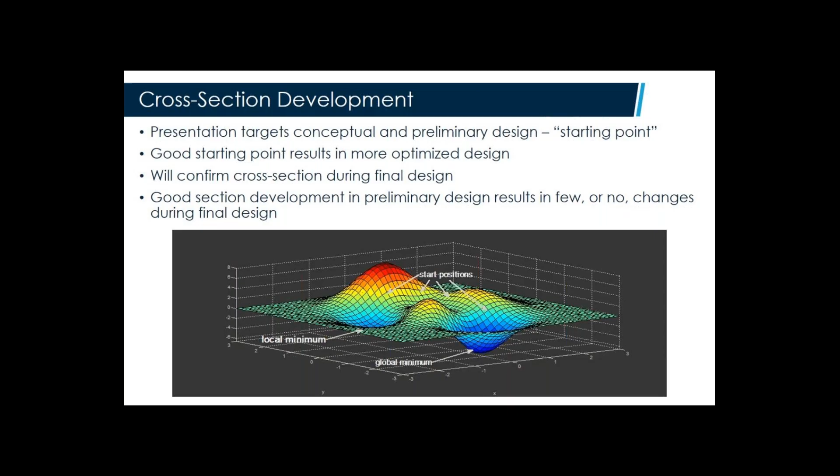A good section development in preliminary design results in few or no changes during final design, using some of the rules of thumb presented in this presentation. This has resulted in final design efforts with very few changes and no backing up, which affects not only your longitudinal designer but your transverse designer and so on. So it really helps with schedule and budget to have a good preliminary design.

We will touch upon the longitudinal behavior, the transverse behavior, substructure considerations, constructability, and a little bit on aesthetics.

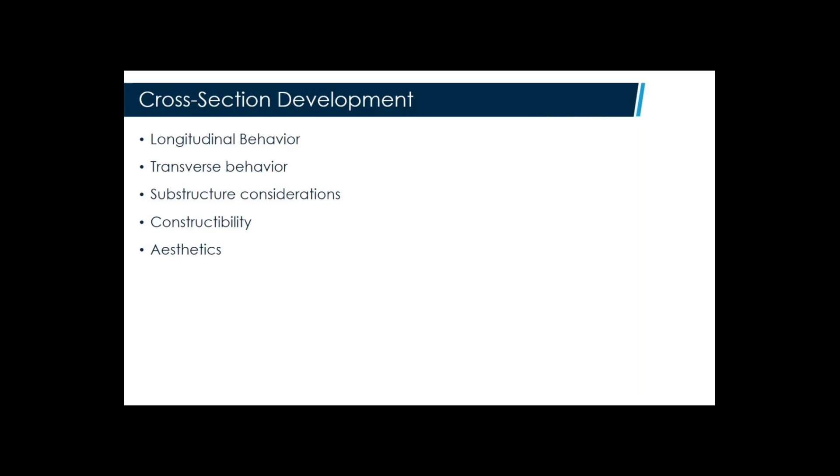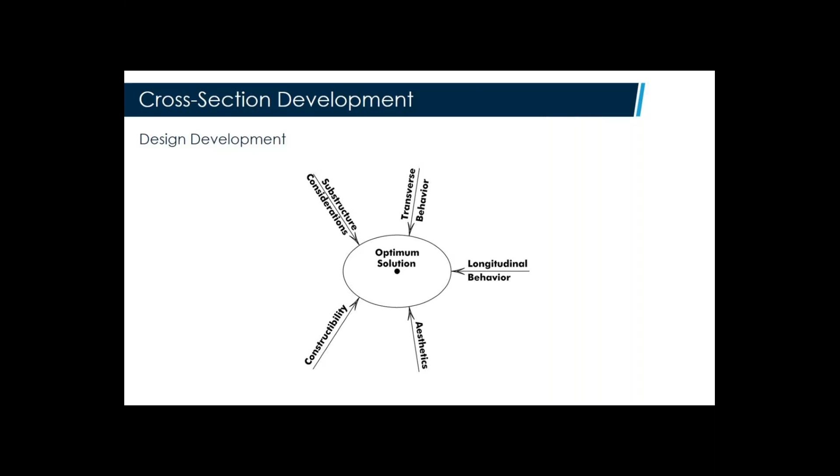Now, when focusing in on your preliminary design, you can't consider one aspect, for instance longitudinal, to the exclusion of all others, or you're going to be doing a lot of backing up. You need to work each one of those shown, constructability, transverse, longitudinal, and so on, together to bring them into a final optimum solution.

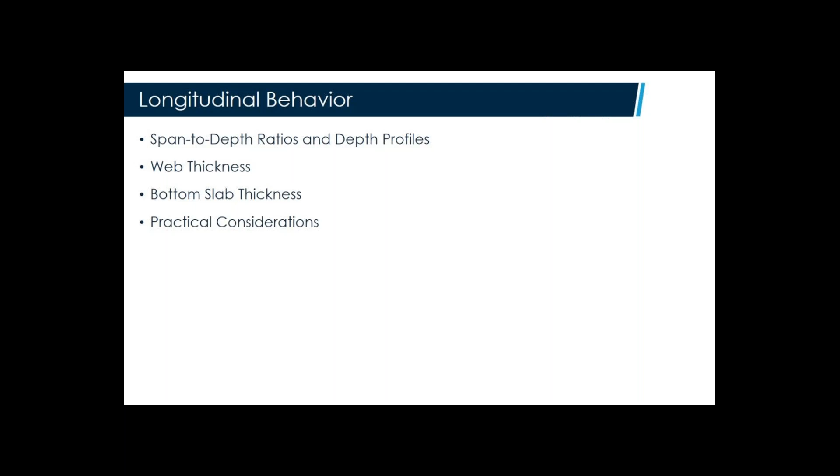Now getting on to longitudinal behavior, we'll talk about span to depth ratios and depth profiles, web thicknesses, bottom slab thicknesses, and some practical considerations. Constant depth structures, this presentation is going to target span by span and balanced cantilever. I'm not going to get into cable stay bridges, but with span by span construction, span to depth ratio of

16 to 22 usually works very well, with 18 being optimal. And for balanced cantilever construction, I'm going to say up to about a 250-foot span before you start wanting to go to true variable depth structures. And the span to depth ratio is a little thinner, 18 to 22, with 20 being optimal.

I will note that, especially on the upper range of these spans, you're probably going to need to thicken the bottom slab. And I'll pause for a moment to say there's going to be some recommendations shown, for instance a span ratio of 18 to 22 or a 250-foot span. That's not to say that thinner or thicker span to depth ratios haven't been utilized successfully, or that longer spans haven't been done with a constant depth structure and balanced cantilever. But if you stick to these limits, you'll typically have a pretty good final design effort.

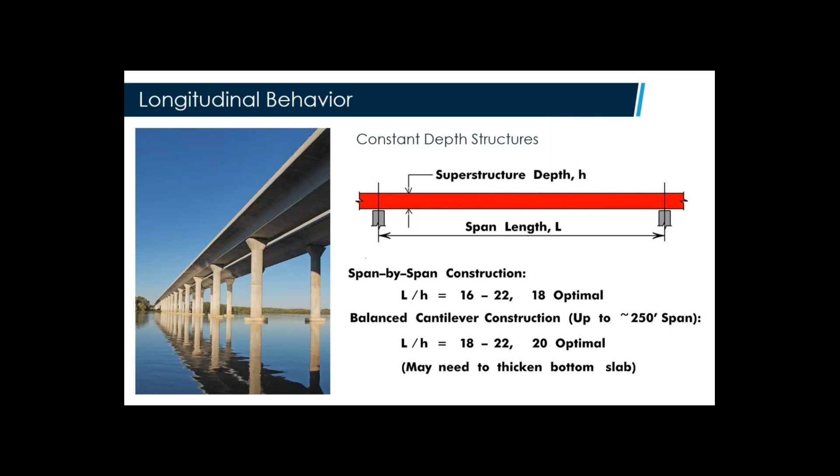I mentioned you need to thicken the bottom slab for balanced cantilever. There's two ways to achieve this. One is to thicken the bottom slab to the inside. This will require a modification of the core form and bulkhead. We'll touch upon those terms a little bit later in the presentation in more detail, but two aspects of the casting form need to be modified. It's not structurally efficient. You have a higher web shear. The inclined compressive stresses in the bottom slab, inclined upward, actually serve to increase the web shear that you need to account for in final design in this situation. And it does decrease the effective depth if you think of the couple between the top slab post-tensioning tendons and the centroid of the compression in the bottom slab.

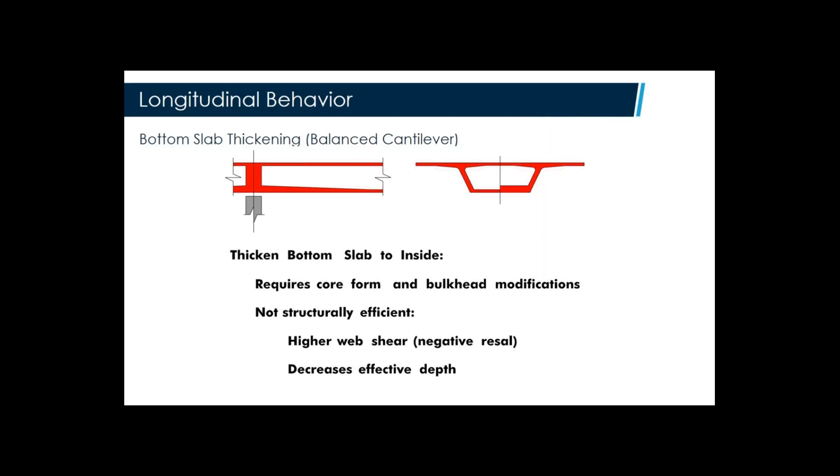The other option is to thicken to the outside. Of course, we get nitpicky - it's not a true variable depth, or it's not true constant depth. It has a little bit of variable depth, but it's usually not noticeable, and we haven't gone to the extent of a true variable depth structure. We're just thickening the bottom slab a little to the outside. This requires changes to the soffit table and the bulkhead. Again, we'll touch upon those a little more, but two aspects of casting form, so about as equally easy to achieve. It is more structurally efficient. It obviously increases the effective depth, and it does not increase the web shear. In fact, in this case, the compression stress in the bottom slab is angled downward, which gives you a small positive Resal or arching effect. Typically in these cases, it's pretty small. You can ignore it or account for it for a little bit more optimization.

Moving on to true variable depth structures. Again, as we push spans above about 250 feet, these have pushed up as long as 750 feet, maybe longer. The depth at the pier is the same as for constant depth, 18 to 22, with 20 being optimal. But we like to thin it up as we move to mid-span. We don't like all that concrete hanging out there in the cantilever state, or really in the continuous state also. So the span to depth ratio at mid-span would be 35 to 50, about 45 being optimal, I believe. I like to thin it up as much as reasonable. If you go beyond 50, you can have some unintended consequences with geometry control. It gets very flexible, as well as negative aspects that could occur if your creep is somewhat more than you analyzed for.

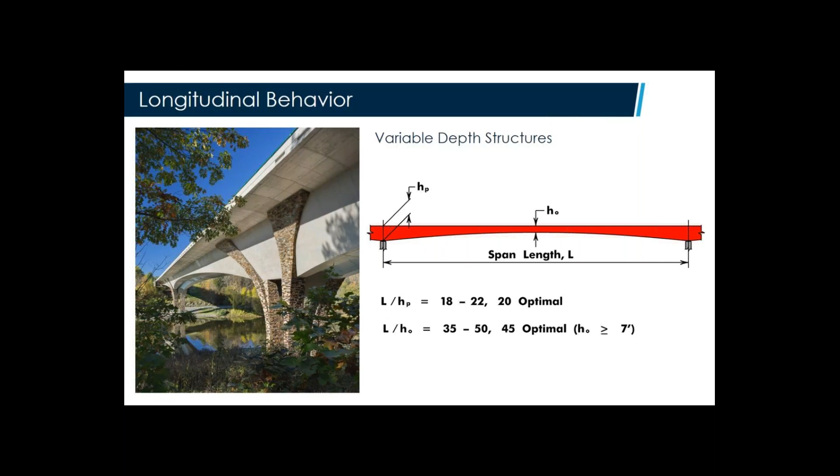So we know the depth at the pier, we know the depth at mid-span. So what is the profile in between? An easy way to achieve this is to set your X ordinate at mid-span, moving towards the pier. In practicality, it's probably going to be starting at the end of your first typical segment, at the tip of the cantilever, and not in the closure or anything, but those are details you can work out. And use this exponent type equation that we can see here.

The exponent's on the X ordinate, and if it's 0, you have a constant depth structure. If it's 1, you have a linear haunch, which again is not very optimized, with a lot of concrete hanging out there, and we'd like to thin it up a little more. If the exponent goes to 2, you're at a true parabola. In my experience, you'll find there will be a weak point somewhere along the quarter point of the span, and that area will govern other aspects of the design, specifically what you have to overcome.

We like to have our bridges governed pretty much equally along the length of the bridge. 1.7 to 1.9 is typically a good exponent to use, with I believe 1.8 being about optimal. You can solve for that constant given the exponent, the half span length, and the depths at pier and mid-span. Sometimes you'll cheat up to the high range if you're trying to work with navigation clearances or something like that, but wouldn't really recommend going more than 1.9 on the exponent.

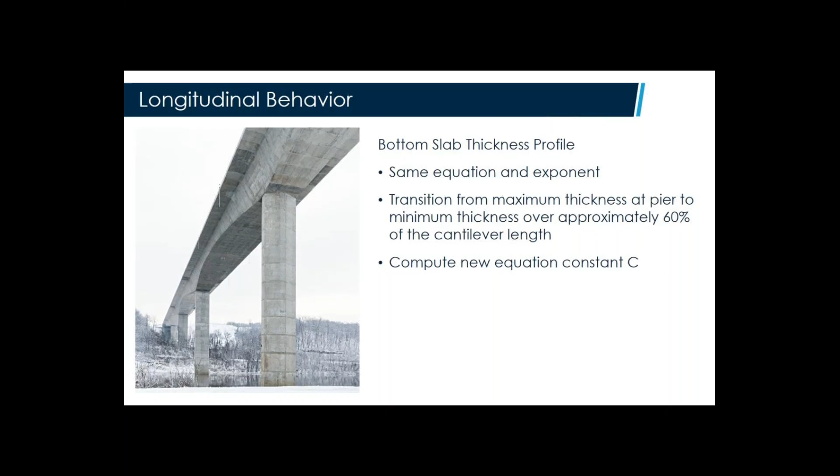Web thickness, now getting into the individual components or elements of the cross section. I recommend a web area of between 0.36 and 0.39 inches squared per square foot of span deck area. This is based upon a notional vertical web, so we don't need to get involved in the inclines and so on. For example, a 316-foot span, 53-foot wide box, 16 foot 6 inches deep at the pier.

You run through the ratio, and you get a total web width of about 30.5 inches. That results in one web about 15.25 inches, so we can say about 1 foot 3 inches.

A little note on setting these dimensions -- we went on the low side here, and if you do, you need to realize you may need to back up in final design just a little bit, so you need to have a schedule and budget to accommodate that. If you're, for instance, in an emergency replacement and schedule is everything, and there's no room to back up, you want to err on the high side of these ratios, just to be sure it's going to work in final design.

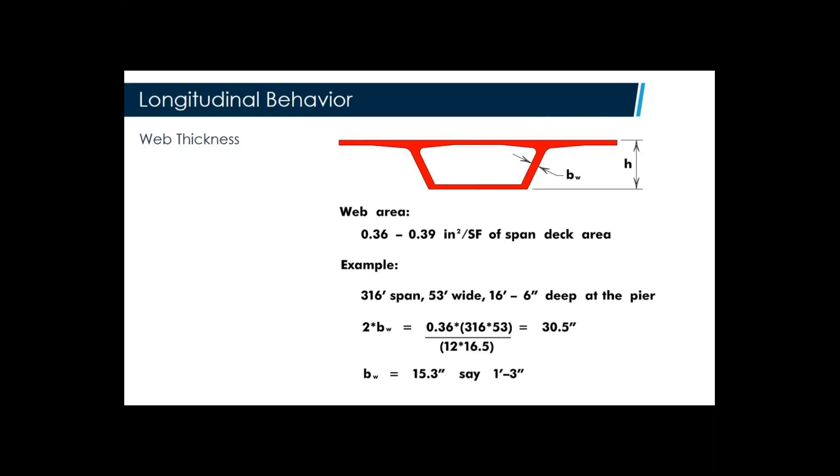Should we use variable thickness webs?

I recommend a constant web thickness for variable depth structures. As you get true variable depth, you have to hold sort of a minimum web width at the bottom, and therefore the thickness doesn't really change that much for the majority of your segments. It just gets kind of unwieldy, so I don't really recommend using it for variable depth structures.

I've most often seen it in span-by-span bridges with constant depth. You can thin it up at the bottom because the live load moments that are kicked into the webs, because of live load on the deck and the monolithic connection, pretty much go to zero at the bottom of the web. So you're only handling shear and torsion at the bottom, while at the top you've got to make additive shear, torsion, and bending requirements.

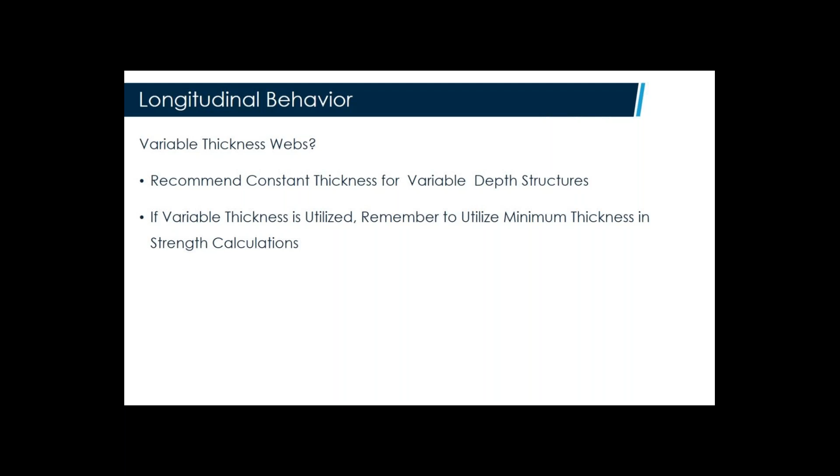If variable thickness is utilized, remember to use the minimum thickness in the strength calculations if you're using modified compression field theory.

Bottom slab thickness for span by span. If you did an optimization for just longitudinal bending, it would pretty much result in no bottom slab. But we recommend having a minimum bottom slab of 7 inches to preserve the closed box section, which we like for a number of reasons. One is that it's very torsionally rigid and provides a lot of torsional resistance for eccentric loads, especially if there's a curve on the bridge.

The other reason is the theory of segmental geometry control. We're basically considering each segment a rigid body that is going through rotations in the match cast position and in erection and so on. You're not going to really have a nice rigid body if you don't preserve that closed box cross section. A word that we should not exceed a bottom slab width to thickness ratio of 35.

We will touch upon that in just a little bit more.

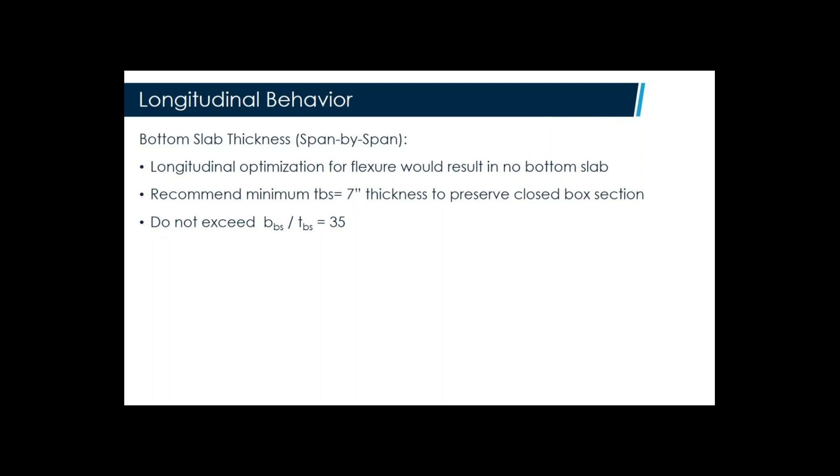Bottom slab thickness for balanced cantilever: the minimum near mid-span is determined by the continuity tendon duct size, bottom slab tendons, typically a little over 8 inches for 12 strand, 0.6 inch diameter strand tendons, or closer to 9 inches for 19K6 tendons, but obviously it depends upon the clear cover requirements of the owner.

And you can work that out. It's pretty simple geometrics with the clear cover, the reinforcing that has to be in there, and the ducts. At the pier, recommend an initial sizing of 9 inches thick for every 100 feet of span. Basically, for instance, a 250-foot span would be 22 inches thick at the pier.

Next step in preliminary design is to check the stresses to make sure that preliminary sizing of 9 inches for every 100 feet is good.

So you check the stresses in the cantilever state, including construction loads, to size cantilever post tensioning and check concrete compression.

A note on this is that if you have significant construction loads, for instance, a form traveler or a beam and winch, pretty much the cantilever state's going to govern the stress, the compression stresses and the tension stresses in the cantilever state, and not the in-service condition.

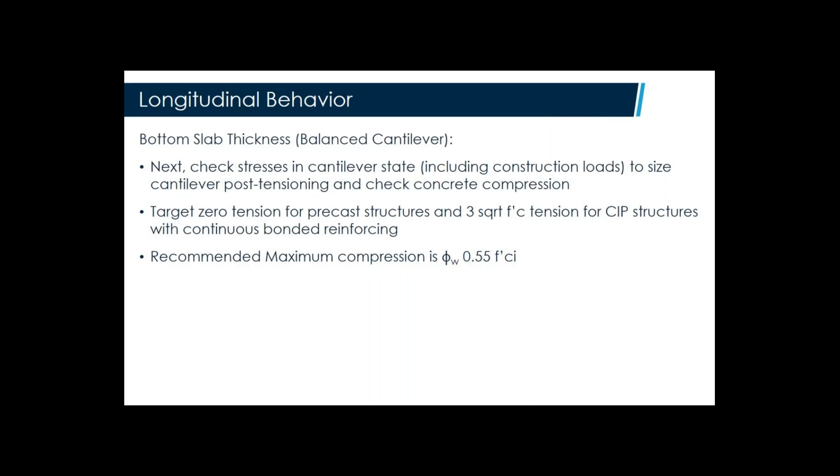There is a phi W term listed here, and we will get into that at this point. This is in the LRFD specifications.

Then you have that bottom slab width to thickness ratio that is termed phi or lambda W. If lambda is less than 15, then you basically don't have to worry about it, or phi W becomes 1. If it's between 15 and 25, it transitions from 1 to 0.75. Between 25 and 35, it's 0.75. The code says beyond that, you need to study it in more detail. I just recommend not approaching that 35 limit, sticking somewhere between 25 and 35, preferably closer to 25.

Then your compression allowable becomes phi W times 0.6 F prime C, just to keep that in mind when you're sizing your bottom slab and checking compression. That phi W term also comes into play when checking your flexural capacity at the strength limit state.

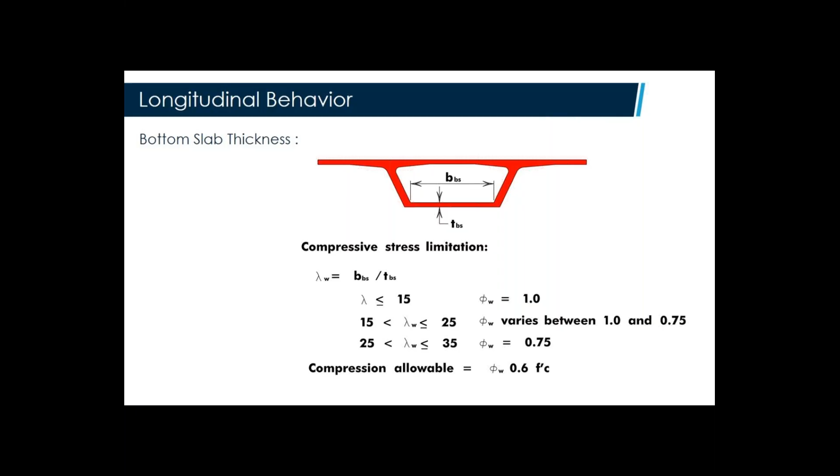Finally, check the bottom slab thickness for the strength behavior. You can do this very quickly by just assuming all the internal post-tensioning is at 95% of guts, your cantilever post-tensioning. It's going to be pretty darn close for a balanced cantilever bridge with quite a few cantilever tendons in there. Maybe a little bit on the low side, but that's good for preliminary design.

If you have any external tendons, not typical in balanced cantilever design, they would be at 90% of guts in the strength limit state. Then you compute the compression block and the location of the neutral axis just by balancing equilibrium. And you check that the bottom slab thickness is not less than the neutral axis location C.

If it's a little over, not a big deal, but we don't like our neutral axis location to climb up the webs, primarily because this results in a transition from a tension failure to a compression failure. And we like ductile structures. We want our structures to perform ductilely and not be governed by compression failures.

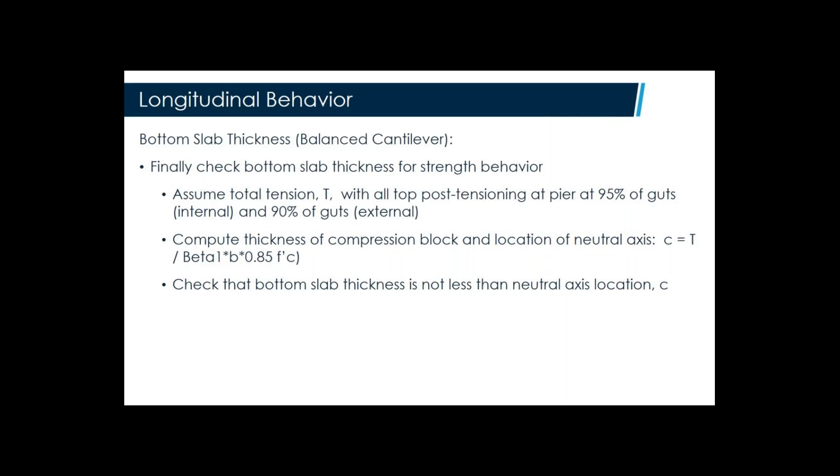Practically speaking, as you transition from a tension failure to a compression failure, your phi factor transitions to 0.75, so you can take a hit on your nominal moment capacity, and it can make it challenging to make the strength limit state work.

Practical considerations: we must be able to fit all the required post-tensioning. Notice we haven't talked about the top slab yet. That's primarily governed by transverse behavior, so we'll touch upon that in a moment. But one aspect is we must be able to fit all the post-tensioning in there.

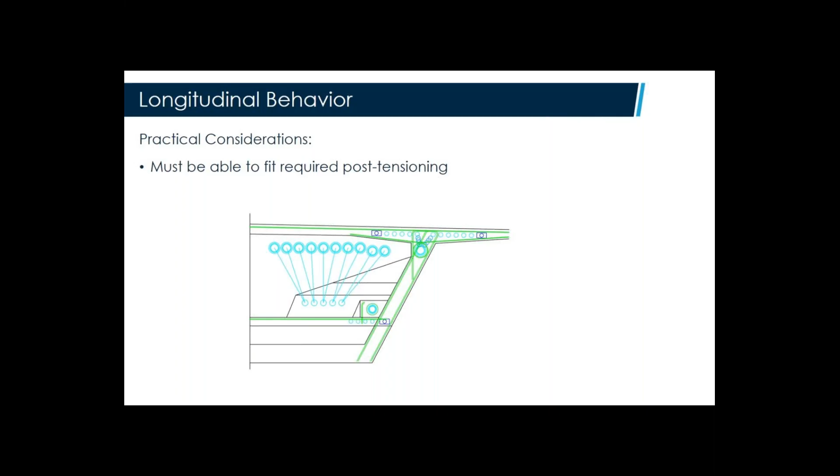A little bit on practical considerations. I'll use the Sagadahoc Bridge in Bath, Maine for this. The 184-foot approach spans utilized a constant 9-foot structure depth. Therefore, we set the mid-span of the main river unit for all spans at 9 feet to match, because aesthetics was very important to this community.

We sort of split the difference. It resulted in a span to depth ratio of 47 for the 420-foot main span, and 36 for the 331-foot river spans. Slightly high and slightly low from optimal, but you're splitting the difference, making it all work together.

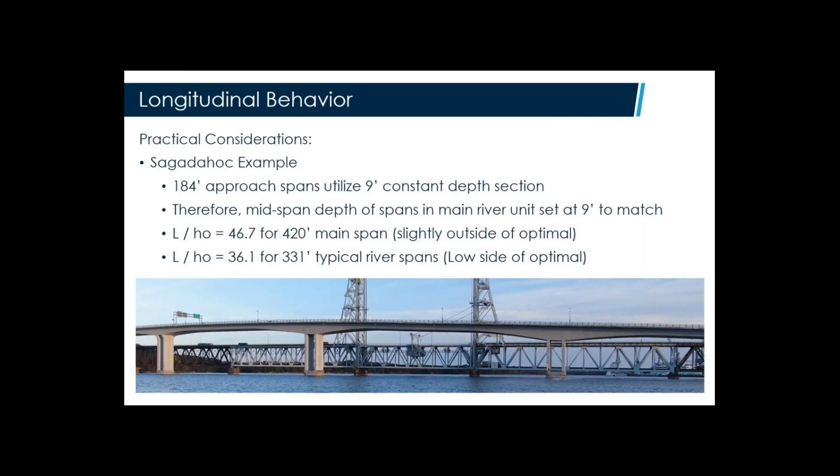In the final selection of the segments and the intrados profile, we developed one that worked in all situations. It was just truncated. So for the typical cantilever on the 331-foot river spans, you had 19 segments that had a certain profile, both in the bottom slab thickness and the overall depth. When we got to the main cantilever, the segments out at the tip, those first 19 segments were exactly the same. And then we just added 5 additional segments as you went towards the pier.

And that required a compromise in the optimized intrados profile, but it helped quite a bit minimize changes to the casting cell, just fewer pieces for the casting cell, which helped save a little bit of cost there. But more importantly, the workers got into the groove of repetition and only had to modify the last 5 segments, which helped quite a bit with constructability.

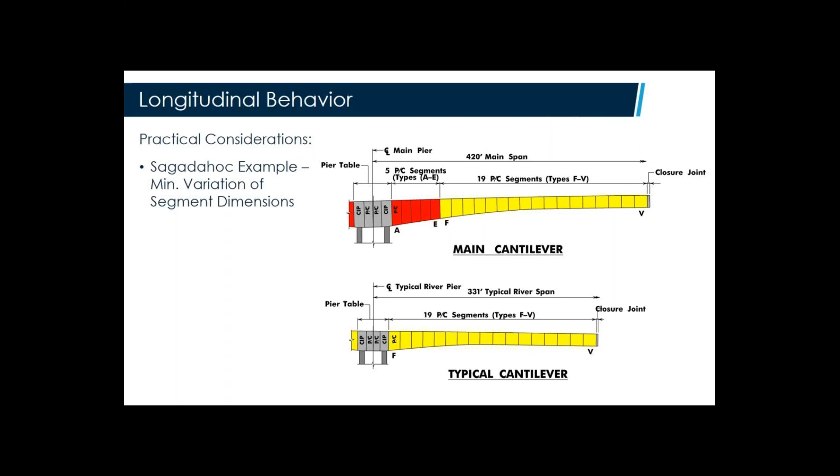So a little bit of a compromise in optimizing materials to optimize the amount of labor required to build the segments. So that was longitudinal behavior. We'll now touch upon transverse behavior. We'll talk about the deck span ratio, element thicknesses, again, for transverse behavior, haunch lengths, and soffit width.

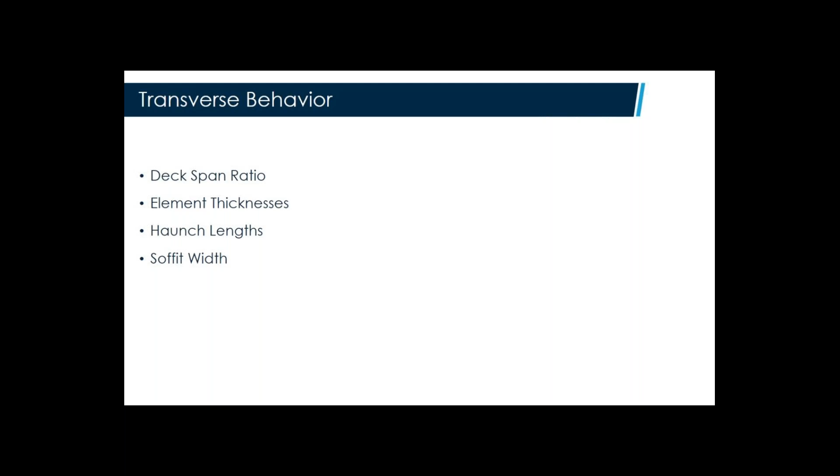By deck span ratio, what I'm referring to is the ratio of the cantilever wing length to the interior span. For initial sizing, you use 1.5 to 2 feet for that knuckle region, and then set your ratios off of that.

Ratios between 0.3 and 0.55 cantilever wing length to interior span work really well. I will say that 0.42 is optimal for transverse design only, meaning that your cantilever wing versus your interior span are going to be close to equally governing and not one over the other.

Remember, we've got to think about other considerations, longitudinal, especially substructure considerations. Sometimes we want to lengthen that cantilever out to about 0.55, which works fairly simply. The lower ratios can be utilized if you have variable width and you're at one of your extremes of about 0.3. It also works very well if you have 2 boxes coming together in a gore area for the exterior cantilever.

Sometimes I've seen very, very short cantilevers that are going to be linked with the other box in a closure pour, and that's okay to make those very short to make the geometry work out, as long as your total interior span is a reasonable length.

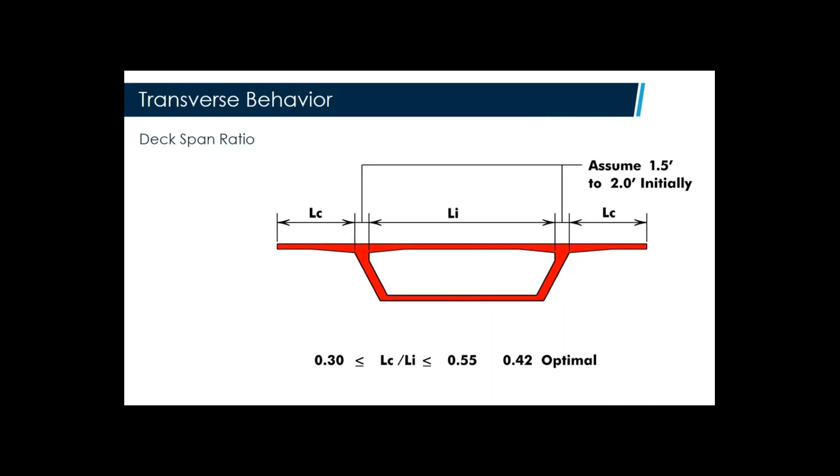Element thicknesses in the top slab: recommend a minimum of 8 inches for your interior slab dimension, getting slightly thicker as we get to wider boxes over 40 feet. This equation gives a good approximation for how much you need to thicken it.

Over the webs, 13 inches for your narrower boxes, and as they get wider you can start thickening that up for structural reasons.

Remember, this is for transverse behavior only, and we need to fit post-tensioning hardware up there, most likely in a cantilever state. So sometimes that 13 inches just isn't going to cut it for a balanced cantilever bridge. But this is just for transverse behavior, and you need to look at fitting your hardware in there, as we mentioned before.

9 inches at the wingtip. This is actually in the LRFD specifications, and that is to accommodate safely the transverse post-tensioning anchors. So we need to provide at least 9 inches.

I'll mention that's for some narrower boxes. For instance, a single track LRT box, you might not be using transverse post-tensioning. It might work out just fine with reinforcing, in which case we don't need to worry about that minimum wingtip dimension of 9 inches, and you can make it 8 inches to match the interior.

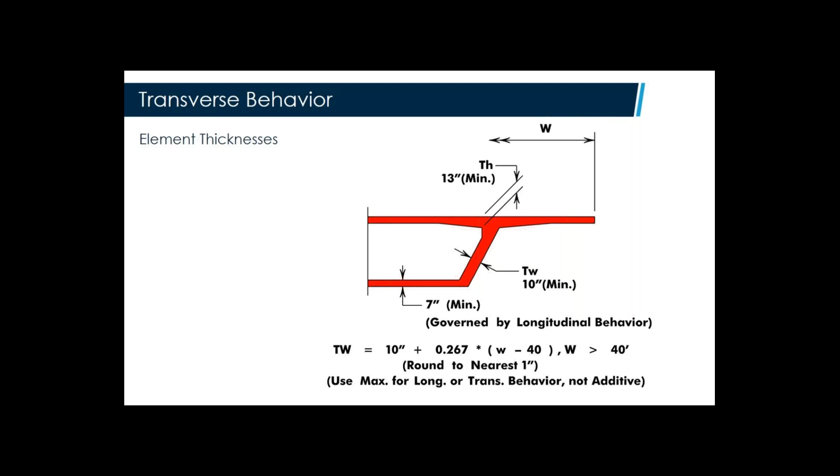Haunch lengths: out on the wingtip, there will typically be a constant depth portion. I don't like to extend that constant depth portion beyond a cantilever length-to-thickness ratio of 10. If not, you'll start having a governing point for your cantilever at the end of the haunch, at the beginning of the constant depth thickness, and that will govern over other places in your box.

And again, we like areas to govern equally, not be governed by one strange point on the cross section. The haunches to the interior, typically you can set it about 0.2 minimum, very close to the counter-flexure point, or as required to fit longitudinal ducts.

That 0.2 is pretty short, might work out somewhere between 0.2 and 0.25 or so for a span-by-span bridge where there's no ducts on the top. But if you have cantilever tendons, it's probably going to be much, much longer and completely governed by fitting all your post-tensioning into the top flange, the deck.

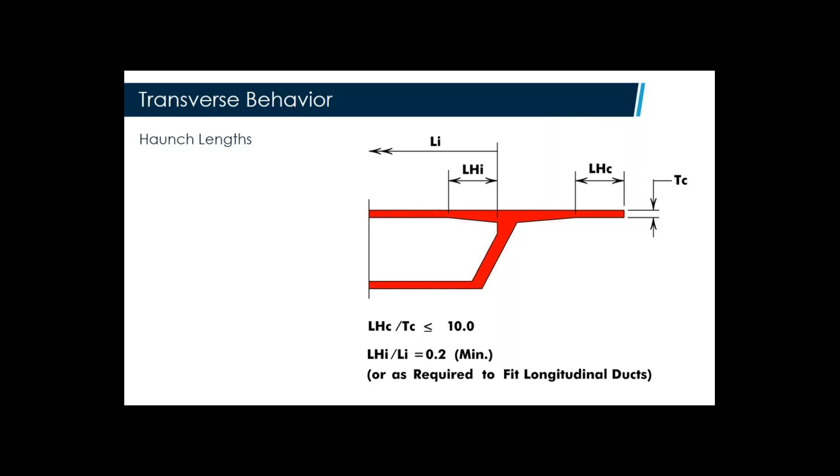Soffit width: remember that in a precast situation, and sometimes cast-in-place as well, we're going to have bearings, and we don't want uplift at the bearings. The bearings are going to be located inboard quite a bit. The center line of the bearing might be 2.5, 3.5 feet in from the soffit corner, so the ratio gets even smaller.

So unless you do a very detailed analysis in preliminary design, if you limit it to W/4 or a 10-foot minimum, you should not have issues with uplift.

We'll note that if you have monolithic connections, obviously if you calculate a tension region just due to the eccentric loads on one part of the pier, it will require additional reinforcing, but it can be fit in and go up through into the superstructure, and it's not nearly as important as it is for a bearing situation.

Web slope: I like to limit it to 64 horizontal to 100 vertical.

Gives you a reasonable design that's going to behave well. I've seen steeper slopes up to 1:1, or 100 to 100. Most of the time I've seen it occurring on cable stayed bridges, and not so much on span by span and balanced cantilever. So I like to stick to this ratio here.

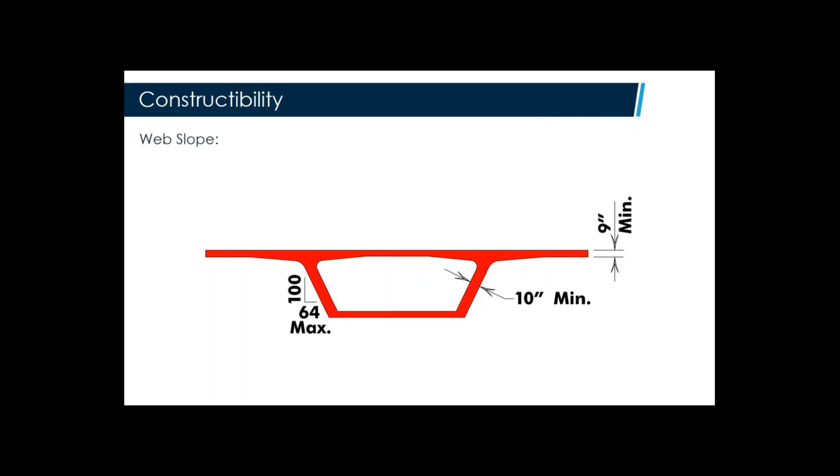Touch upon briefly substructure considerations. After sizing the piers and the foundations, the challenge can be focusing the loads from the deck and all your live load down into the substructure, especially for very wide boxes, three-web boxes and so on.

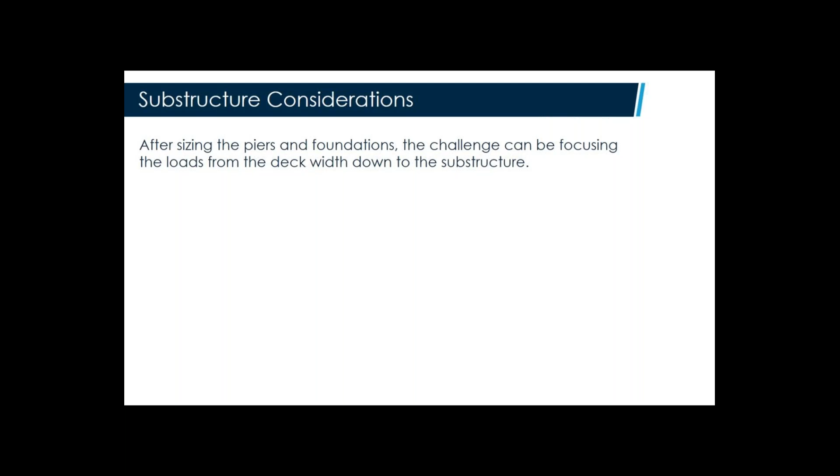Many times we're trying to minimize the pier and the foundation size, especially if it's out in a river, and we're trying to minimize the cofferdam size. The cofferdams are very expensive components, so we're trying to minimize the foundation and the pier size, but we've got a very wide box, so we're trying to focus those loads inward as much as possible, going up to the maximum ratio of the cantilever wing length, using the maximum web slope to start transitioning those loads into the narrowest profile possible.

That helps also minimize the cap size, though it doesn't look like it from this graphic with no architectural treatment, but it could be a lot worse.

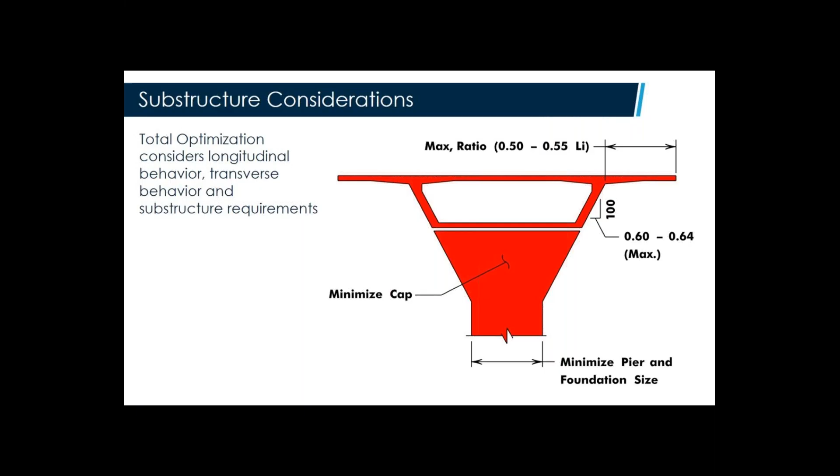Another substructure consideration is using single piers or twin wall piers. I like twin wall piers a lot. They provide a very stable platform to erect your cantilever because they basically form a compression and tension couple. As long as you keep the space between them, between 20 to 24, with 20 being optimal, you should not have uplift, given the vertical downward load versus the couple from the out-of-balance should balance each other out. If you get much thinner together, you can have uplift during construction.

And that's not good. You're going to end up having to require tie downs or something else. If you don't use twin wall piers as a platform during construction, you're typically going to need, unless you have a really, really stout single pier, some struts or temporary piers on one side or the other or both. That adds costs. There may be a separate foundation required for it. So I like to include it in the structure as a whole as a twin wall pier where possible.

The other aspect I like about twin wall piers is that they can be very flexible because there's not a lot of bending induced in them in the cantilever state, because it's all handled as a couple, compression and tension in the two twin wall piers.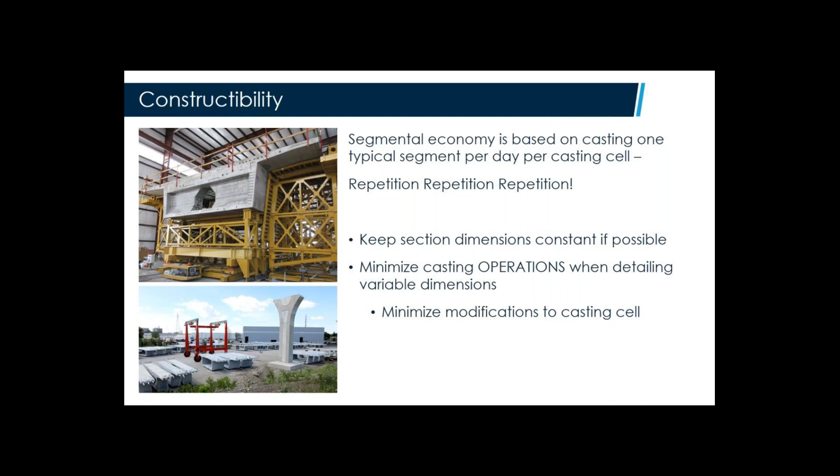Therefore, we want to minimize modifications to the casting cell. Now, this is a typical casting cell. I believe this is the Four Bears Bridge, actually.

In the interior of this single cell box, you see what we term the core form. Underneath the bottom slab, or the bottom soffit, is the soffit form and the buildup to it, termed the soffit table. To either side, you have the outside web and wing forms. You can see that they rotate outward and pull outward slightly, and rotate down to facilitate stripping.

Not shown here, but what forms that face of the segment, at least on the back side, is the bulkhead. It's a metal bulkhead that forms the shear keys and so on. This side was formed by a match cast segment that just got removed and went to storage.

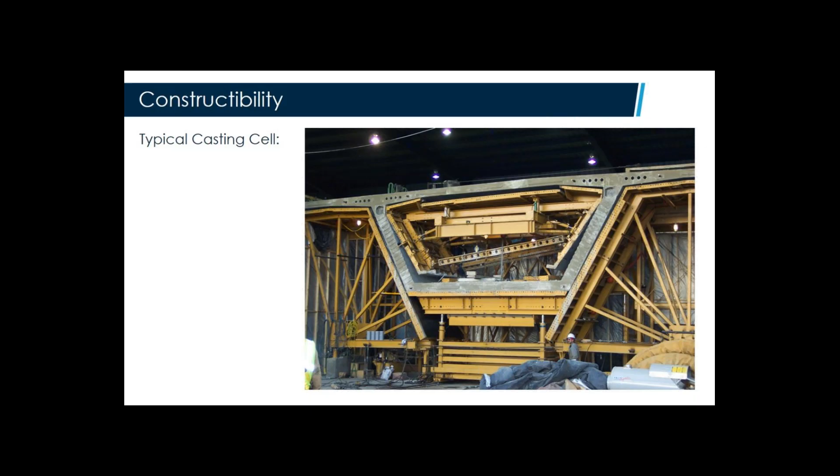So to review graphically, the core form is shown in light blue, the soffit form, soffit table if you will, in red, the web and wing form in green, and what wasn't shown or obvious in that other picture was the transverse bulkhead, shown in yellow.

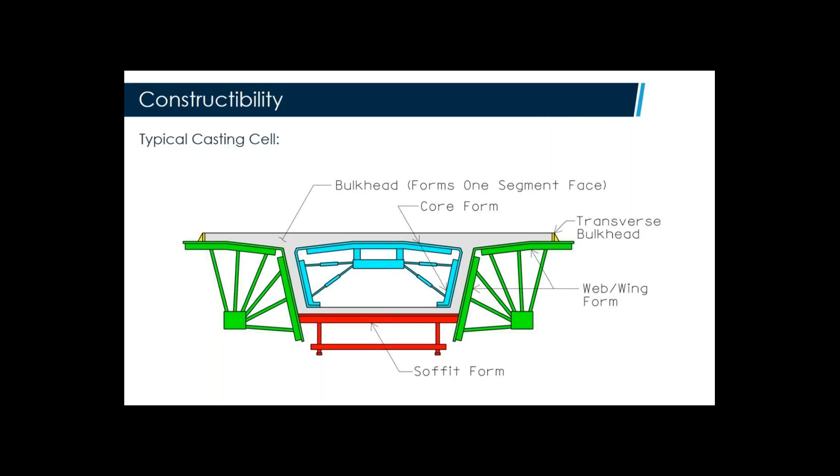So handling variations in segment dimensions, two general rules. One is to maintain the core dimensions that you can see outlined on this graphic, basically the top slab between the webs as well as that knuckle region. If you can keep that constant, you're going to help a lot with constructability, and also maintain a constant web slope, another good rule of thumb.

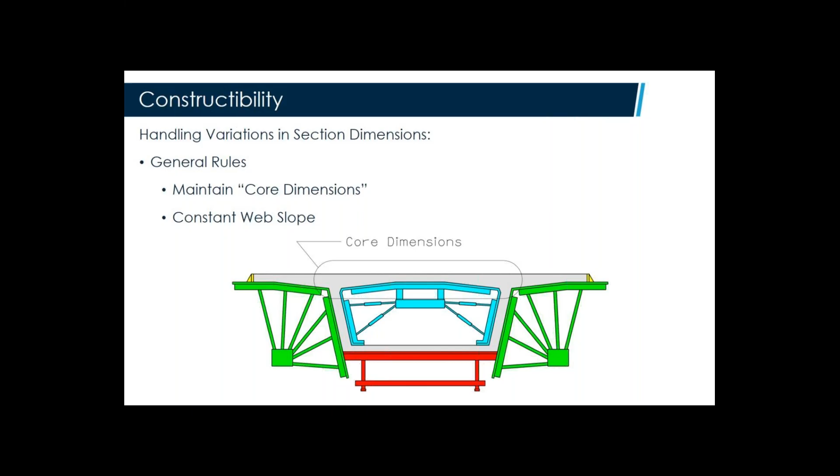So how do we handle variable width? We can vary the cantilever wing length, and it's pretty simple. That transverse bulkhead just moves in or out. The wing forms will typically be manufactured already to handle the maximum length of cantilever wing, so you're just moving that bulkhead in and out. It can be done by two workers in a matter of less than an hour.

If you try to vary that interior transverse span, you're going to be changing your bulkhead, changing your core form, moving the web and wing forms out, changing the soffit table—basically changing out the whole casting cell—and it becomes much, much more difficult to handle. So if you can, try and handle it by varying your cantilever wing lengths.

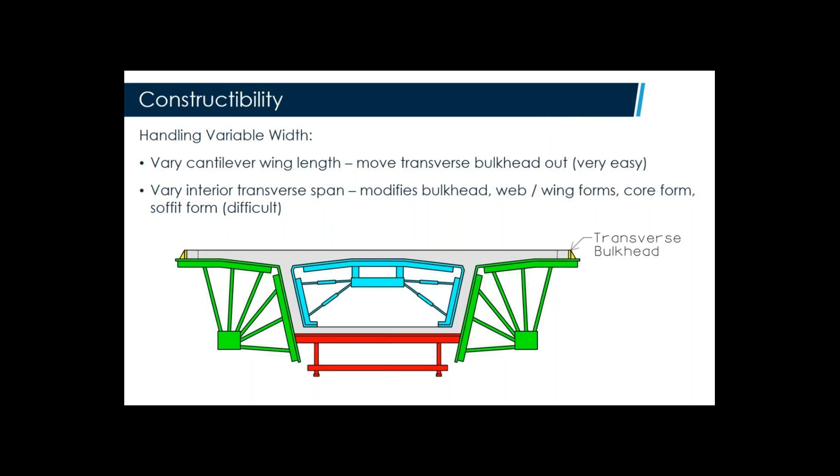Another thing we come up with as far as variable dimensions, how to handle variable crown points. Maybe we have a shoulder that's at a set cross slope, but then we have super elevation changing as the box goes through a curve. So if we can locate that variable crown point in the cantilever wing, as we can see on the left of this graphic, it's pretty easy. You can rotate the wing form down. It's going to obviously require some modification to the bulkhead, but that's pretty easy to accommodate, all things considered.

If the variable crown point is between the webs, it gets a little more complicated. But if you can try to vary only the bulkhead and leave the core form alone, as shown on the right here, remember that we can rotate this entire box as a rigid body to accommodate the final required cross slopes also. So if you can accommodate it by just thickening the slabs a little or thinning them up within reason, it's going to work very well. Obviously that falls apart as your elements get too much thicker, and you're going to have to bite the bullet and do something different.

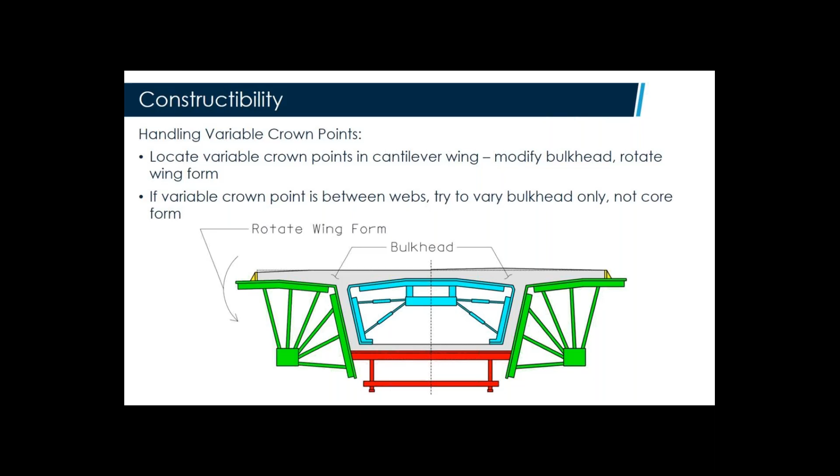Having variable bottom slab thickness, thicken to the inside. It's kind of hard to see, it's on the left, but you can see a dotted line where the top of the bottom slab was, and that's going to obviously require a new bulkhead piece at the bottom, as well as modifications to the core form. Typically there will be panels that just bolt onto the core form to form the variable overall depths in the core there.

If you thicken to the outside, you can see in that case that the core form remains the same, but you're going to modify the soffit form. Typically there's little cantilever wings, if you will, that bolt onto the soffit form that accommodate the variable width due to the sloped webs. So either way has about the same amount of effort.

I will mention again, keep the variation the same at all locations where it's needed, as we talked about in our practical example. I worked on helping produce shop drawings for a bridge which had been designed by someone else, where they optimized the amount of material required differently at every pier, and that required just tons of modifications to the casting form, and then the workers trying to keep track of that and not make any casting errors. Very onerous—again, a little bit of extra material to make things simple.

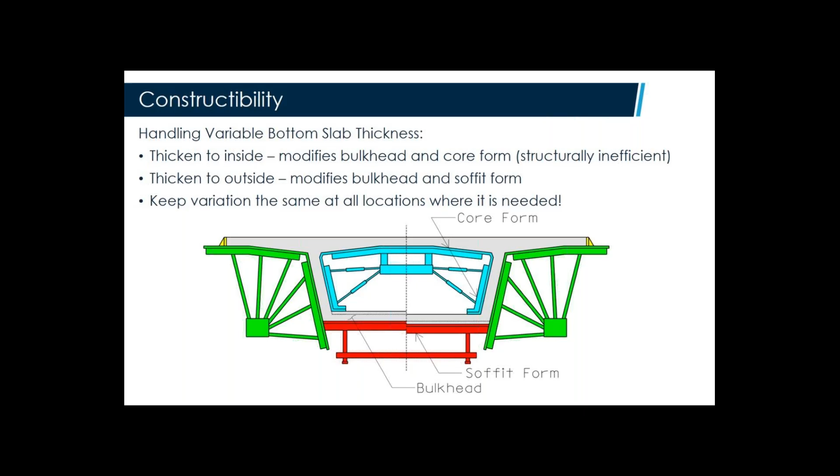So you're requiring modification to three components. But if you have to do it for a longer span, you have to do it. And in my experience, it's still quite easy to cast one segment per casting cell per day.

Variable web slope might help minimize changes to the soffit form, but it's not advised. It would require, since you have a different web angle at different joints, warping of the web form. The form would have to be made flexible enough to achieve that warping, and we'd like our forms stiff for obvious reasons of concrete placement. In my experience, you'll be fighting it in the casting yard trying to close up your forms. It becomes really kind of a pain to work with.

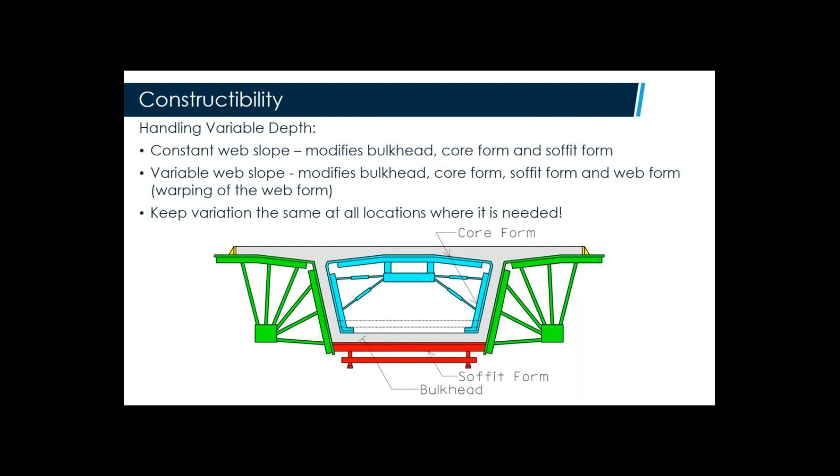Touch upon aesthetics, won't get into it too much. Aesthetics is in the eye of the beholder. But I will mention that, at least I believe, box girders are inherently aesthetic, whether it's variable depth shown on the Winona Bridge to the left, the Moab Bridge out in Utah in the center, or whether it's constant depth on the Susquehanna River Bridge you can see on the right there. I think they look very clean and very aesthetic.

So there's not a whole lot of reason, in my opinion, to make significant costly changes to commonly utilized cross sections.

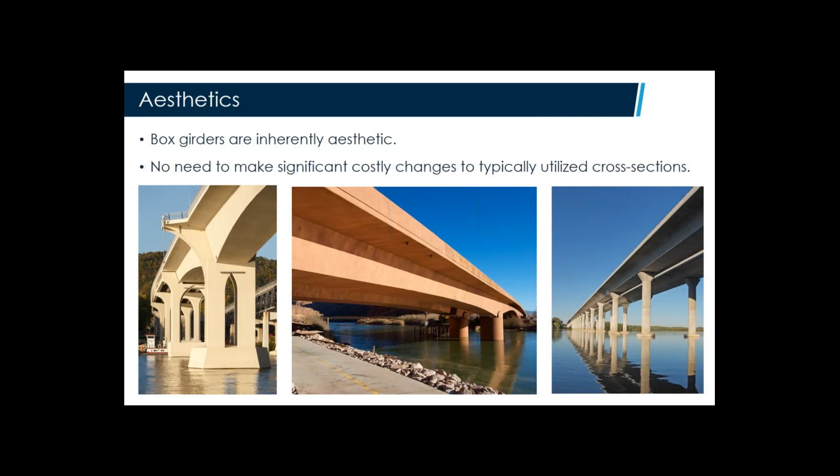There's some minor modifications you can make, angular fillets and corners to match hard surroundings and pier shapes. For instance, the Hanging Lake Viaduct in Glenwood Canyon, the canyon had horizontal strata of limestone in the formation, so I wanted to match those horizontal hard lines. You can use rounded fillets and corners to soften the box a little. You do it to the extent shown here, it's not really that big of a deal.

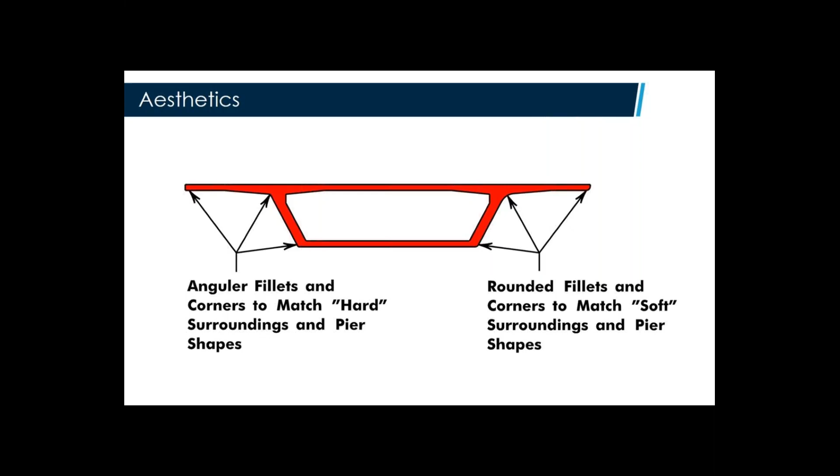This is the Allegheny River Bridge showing angular fillets and corners. And this is the Lee Roy Selmon Expressway that went to an extreme in rounding it out to soften it. Personally, I would not take it to that extreme, make it a little more subtle. Again, focus a little more on constructability. But the rounding gives certainly a nice appearance to the bridge.

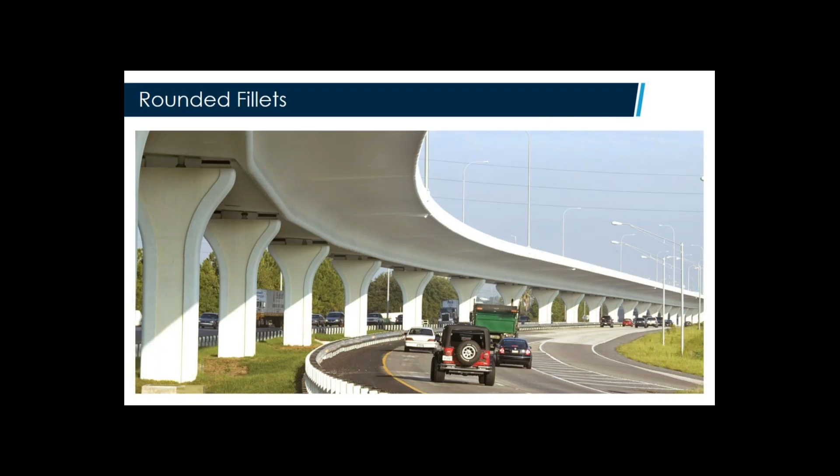One of the issues with the aesthetics is our structure depths, especially for urban viaducts. We're very close to the ground, maybe just have minimum clearance underneath. They tend to look massive from the ground. So there's a number of things you can do to help combat that visual appearance.

One is to use long cantilever wings so that the webs retreat into the shadows. A thicker bottom slab, the eye doesn't interpret that thickening of the bottom slab so much as structure depth, as if it was all in the web. Highly sloped webs, in my opinion, also tend to minimize the apparent depth to the eye.

One of the big things we can do is with our railings. If you have a solid railing, the eye interprets the railing and the bridge together as the structure, even though we know the railing doesn't have a structural function as far as the longitudinal and transverse design, except for impact loads obviously, but it's not a structural element as far as the longitudinal design goes. If we can use open railing, then we can minimize that apparent depth because you don't see that solid thing, and things look a lot better.

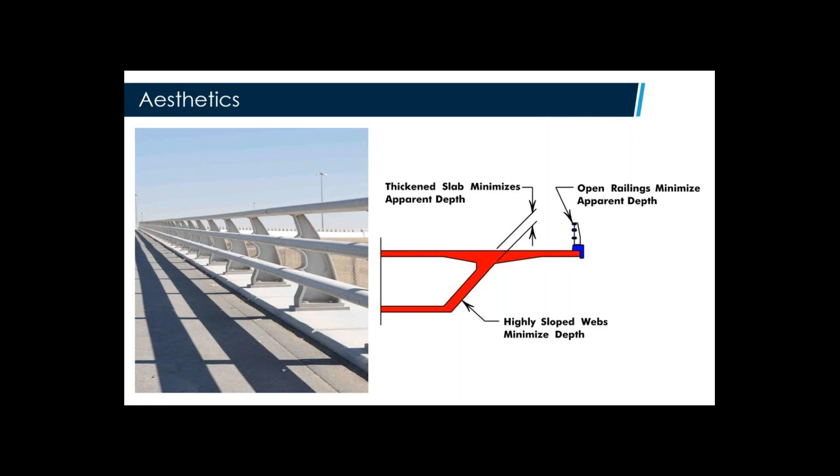Another thing you can do is use a coping on the edge of your box. This helps hide segment joints and gives you a very smooth line that you can achieve. There is obviously some cost to it there.

Slip forming is pretty much out, I would believe. And even forming this in the conventional manner with that coping is more difficult than if it were all on the deck. Some say it protects anchors, also has a minor effect in that. In modern post-tensioning, we already have multiple layers of protection - the grout, plastic cap, pour back - so doing it just for the purpose of protecting anchors probably isn't warranted in these modern post-tensioning systems we use.

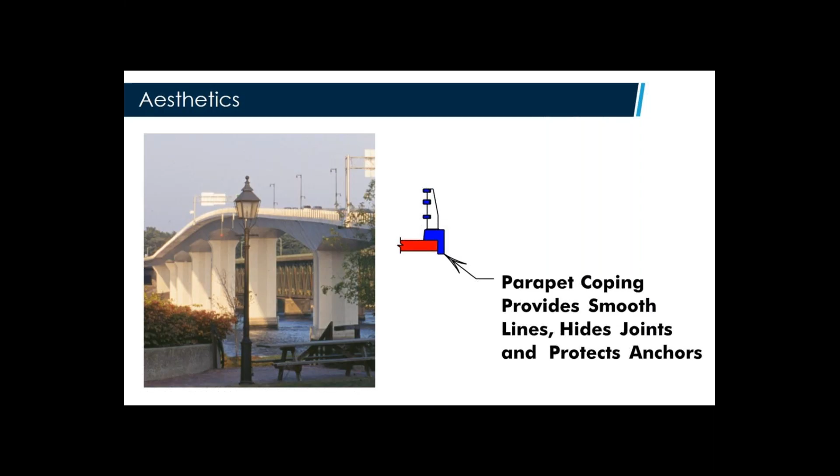Whoops, oh man, sorry about that. It's gonna be hard. I'm gonna have to go all the way down to the end.

As a person I admire, a very smart person, Albert Einstein said, everything should be made as simple as possible. If you're having trouble describing your design in the drawings or specifications, it's probably too complicated. We want things to be easily constructible.

On the other hand, sometimes we have to do what we have to do - variable depth structures, other project requirements. So everything should be made as simple as possible, but not simpler - not simpler than that required to achieve your project requirements. So the final word is: keep it as simple as you can.

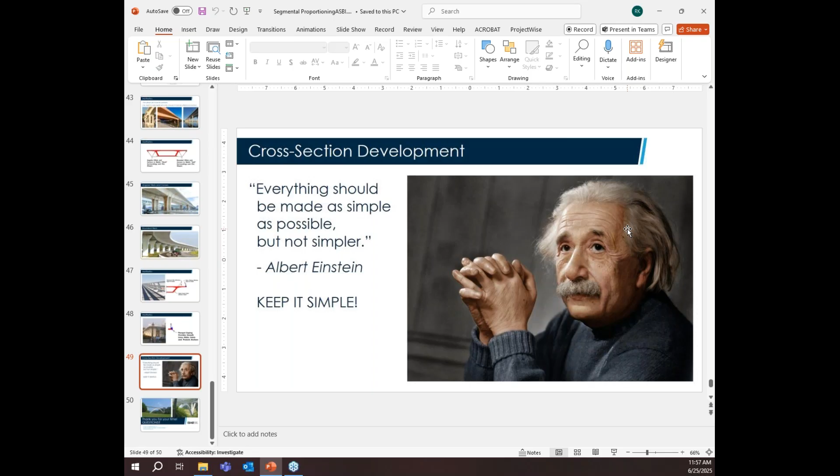And that ends my presentation. I thank you for your time. And there should be some time for some questions, I believe.

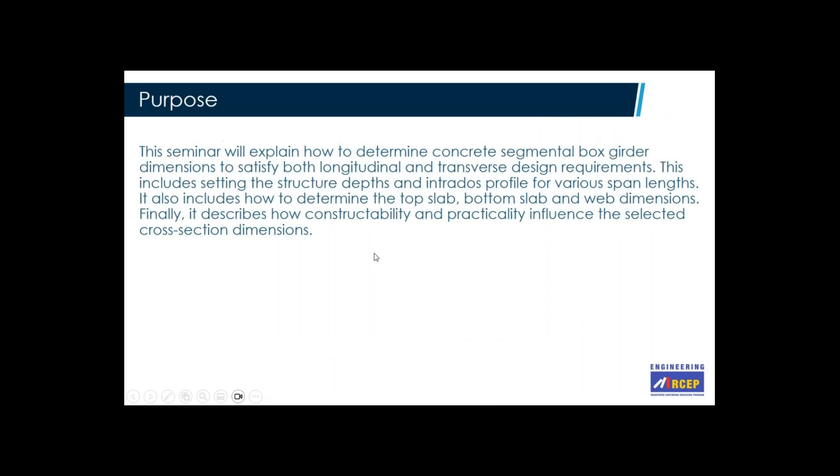So I guess the assumption here is that these rules of thumb and guidelines are applicable to sort of the AASHTO design code. What are your thoughts on the applicability to perhaps the Canadian Highway Bridge Design Code or even the Eurocode? I think generally they're going to apply well. If you follow these rules of thumb, it's going to work out fairly well. Your live load is typically slightly heavier, I believe, in the other codes, so you need to account for that. But other than that, I think these rules of thumb are going to put you in the ballpark.

Yeah, they're sort of first principles based, right? Right, exactly. And then what about for, say, light rail transit?

I think you mentioned that in a couple of spots, and of course the picture on the screen here is a light rail transit structure. What are your thoughts on the applicability for that? I think the overall span to depth ratios, the applicability is quite good. Your top slab might be the only case where you're looking at it a little heavier. Again, you've got heavier live load. The amount of post tension you have is going to be increased, but we really didn't talk about sizing and post tensioning. But I think it's generally applicable. The span to depths work out. The only caution is you might want to look at the web thickness a little tighter and err on the high side of that ratio, since the live load for light rail is typically 2.5 times AASHTO live load, at least on a per lane basis. Okay, great.

Yeah, okay, good to know. When you were talking about the variation of the depth for a variable depth box girder, you talked about using that Intrados curve, and there have been some bridges where the variation in depth was handled with a linear variation along the length of the span versus a curve like this. What are your thoughts on the advantages and disadvantages of either one?

Well, a linear variation, in my opinion, ends up with too much concrete out there in the cantilever state versus a curve that thins it up quicker. So it's going to be more onerous on your bottom slab thicknesses to handle negative moment, as well as your cantilever post-tensioning. In either case, as far as casting the segment, you're going to modify the same amounts of formwork. For a true variable depth, you're going to be modifying the soffit table, the bulkhead, and the core form, whether it's linear or curved.

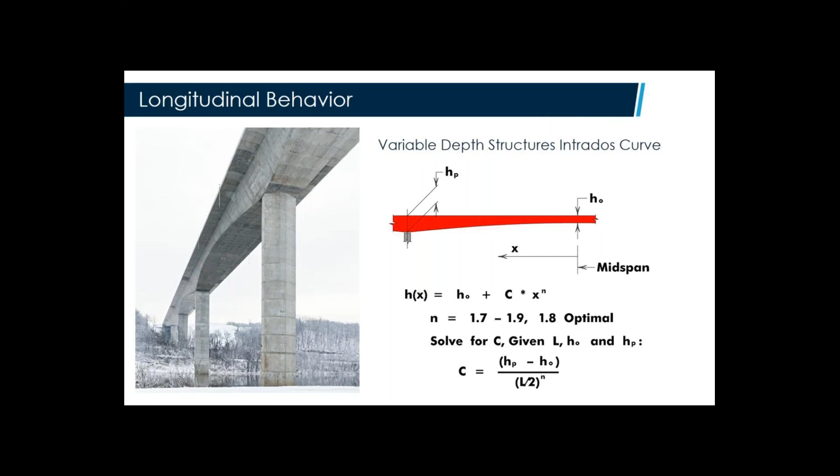So in my mind, I would always go curved for these long span bridges, where it's true variable depth. The exception is if we have a minor thickening in what would otherwise be a constant depth structure, keeping the core form the same, again upwards of 250 feet or so. These are typically done linearly because you're not trying to emphasize the curve overall in the span. So again, in my opinion, I think it's much more optimized to go with the curve than linear.

Yeah, it's an interesting point. It sort of looks easier on paper because it's a linear variation, but in the real world you're still having to vary the depth of the casting cell each segment, and within the length of the segment it's still a chord from one end to the other in terms of that slope. So there's no advantage in detailing the rebar either, it's exactly the same. It's just what it looks like and the consequences. And if it's linear from the pier to the center of the span, it's a lot of concrete you're supporting out there versus if you thin it up faster with an exponent greater than 1.

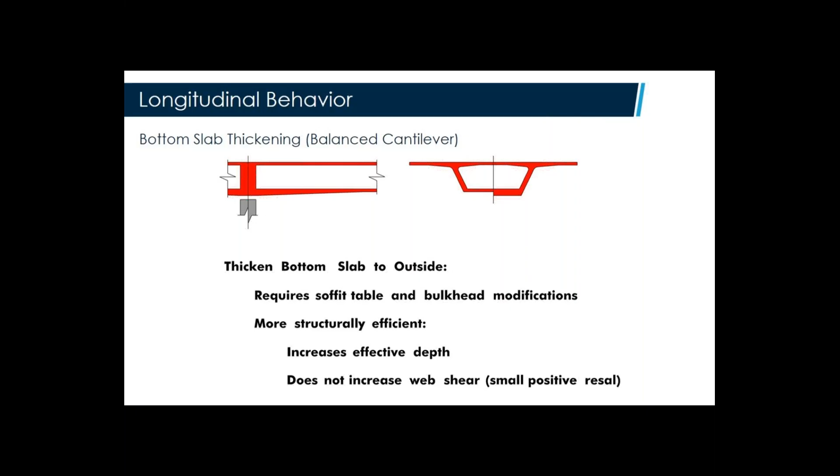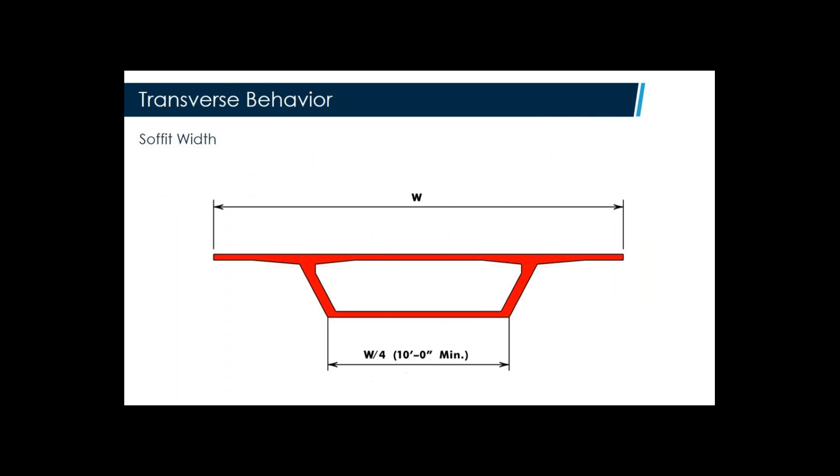All right, one more question about the twin wall piers. Good discussion on that. Would it be possible or advantageous to have a mix of twin wall and single column piers on a project, or on a bridge, or within a unit? Yes, that's possible. One case that comes to mind is the 4th Street Bridge, where we used twin wall piers. We had a single long span over a rail yard, and then as we got to the side spans, they were much shorter, and the end spans were actually cast on falsework, with the cantilevers meeting not at the span length itself, but partway in between.

A combination of twin wall and single piers worked well. The twin walls were monolithic, the single piers had bearings. It was fairly close to the ground, but yeah, there's no reason you can't mix and match given your project constraints.